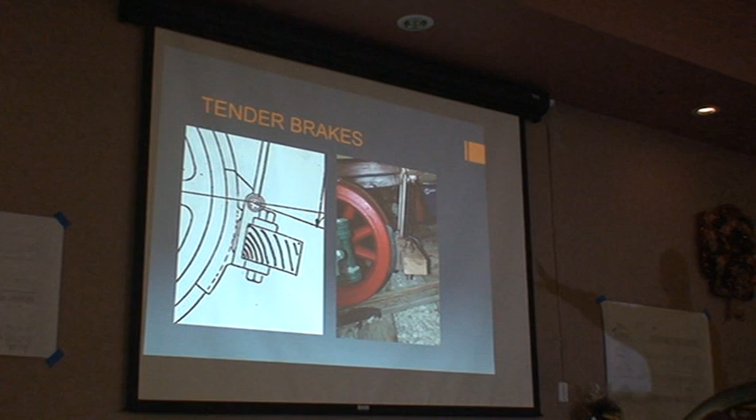Unlike a lot of restoration projects, a real challenge we've had is that we don't have anything to start from. There are no, as far as we know, existing parts of the Lyon, so everything has to be built from scratch. So here you can see, on the right-hand side, the actual Lyon's tender. This is one of the tender trucks. And over the last year, we've been fabricating parts of the brake system. So you go from a drawing of a brake on another Union Iron Works locomotive from that time frame, into bringing that into existence.

Now, we are, as you might imagine, a pretty low-budget organization. Unlike state-sponsored museums, we don't have access to even meager tax dollars. We don't have a museum where we can really have enough of an attraction to charge people admission. So we have to get by sometimes by hook or by crook.

And in this case, when we were fabricating brake beams for the locomotive's tender, we actually made friends with somebody who owned a steam-powered sawmill in Iowa. And there was a windstorm, so some oak trees had fallen over. So we asked somebody if they'd please give us their fallen oak trees, which they were happy to do. We took them over to our friends at the steam-powered sawmill and had them cut up our brake beams as well as a pilot beam for the locomotive. Total cost, $0.

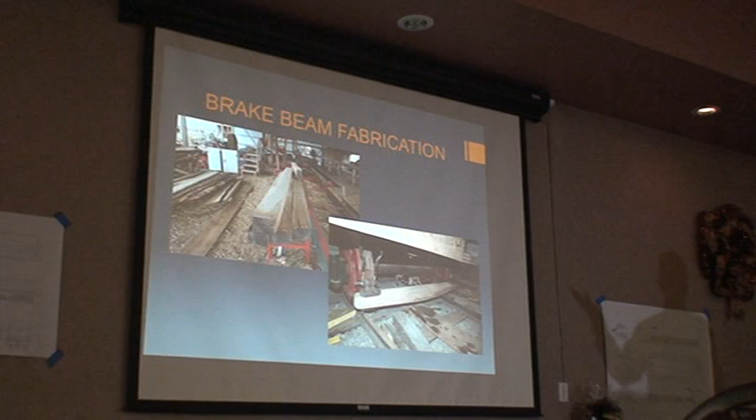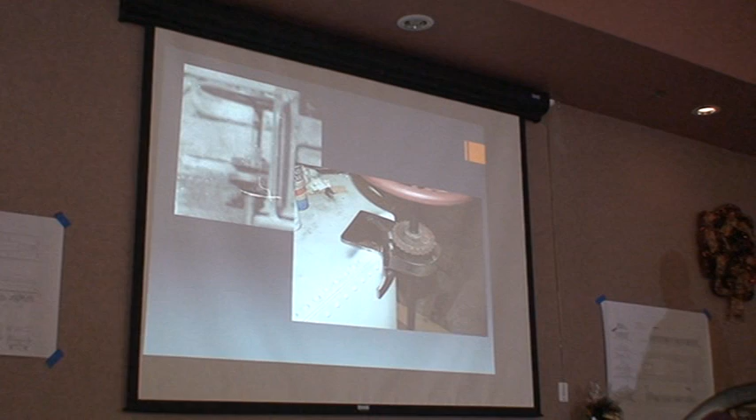Then we're also doing classic rivet counting. So we want to make the LYON replica as accurate as possible, but when you're dealing with things like a tender and you don't have a measured drawing to go off of, you've got to look at photographs. You've got to study, well, how many rivets are attaching the brackets to the tender? And then how high up does that go on the tank so that we can come up with the size that we're going to use for our original. And in this case, the tender attachment brackets, we were able to get a blacksmith in Iowa to fabricate those, again, for free for us so that we can keep the project moving forward.

And here you see Stan Gentry with his homemade rivet furnace, taking out that white thing at the end of tongs. That's a glowing hot rivet that he is taking over to the tender so that we can rivet the attachment bracket onto the tender tank.

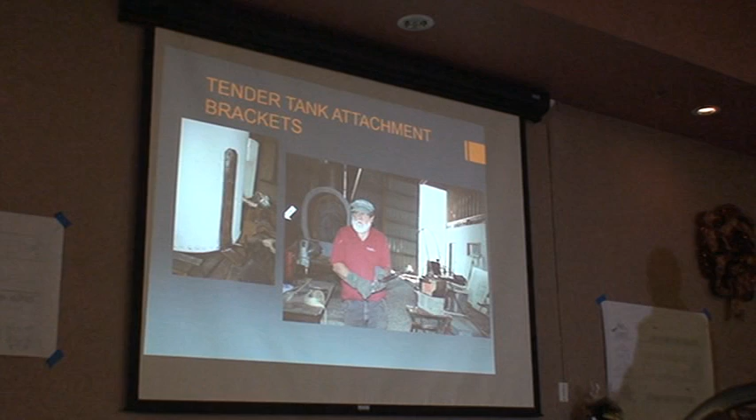And then about a year ago, we were very happy to finally, for the first time in, actually, about 100 years, unite the LYON with its tender. So we dragged it outside the main museum locomotive shed and had the LYON together with tender. What you see on it right in this photograph is not the boiler. This is a wooden mock-up of the boiler that was made so that the LYON could participate in a 4th of July parade. And that's an interesting story.

You could call that a parade, but actually during the course of research for paint, so we're trying to figure out what color was the LYON, what did it look like? We were searching through old newspaper articles, and fortunately a lot of newspapers, especially historic newspapers in California, have been digitized, and you can search them using a word search. We found a mention of the parade in San Francisco to celebrate the completion of the Transcontinental Railroad, so the Pacific Railroad parade. And there was an account of all of the units that marched in that parade.

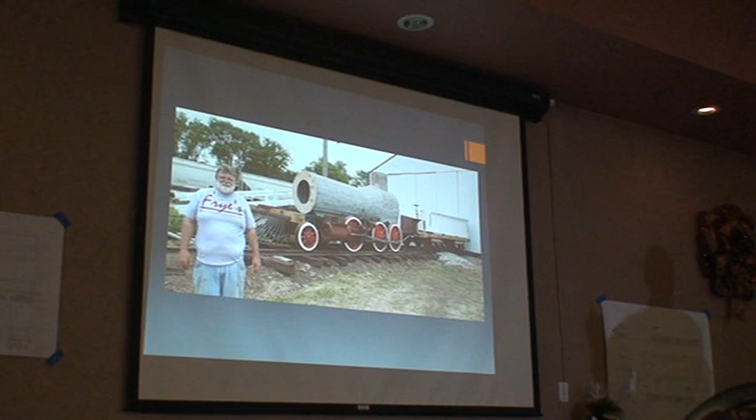So we wanted to keep up the tradition and have the Lyon be in the parade again. And this is one of my favorite photographs. I think the last time we were here, I had this smokestack in a trailer outside so that people could see we had just completed the smokestack.

So this is when it's united with the locomotive for the first time. Of course, it had to be hoisted atop that wooden boiler. But you can see the front view, that very distinctive view of the Lyon with that absurdly tall smokestack. So I think that's a signature view of the Lyon right there.

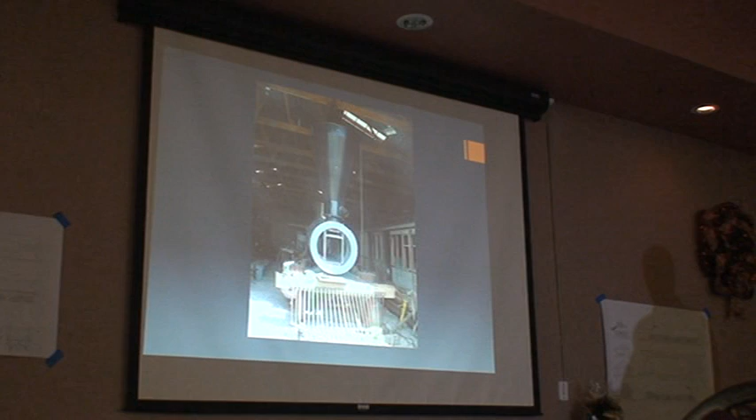Now the tender tank painting, this we could not have, I think, done anything remotely accurate without a lot of outside help. And many people who helped in that project are here in the room today, but I think no person helped more than Jim Wilkie. And it really started with a study of this photograph.

The Lyon did not have a very long service life on the Virginia and Truckee, only running from 1869 to the 1870s, and then very rarely used after that, and not used at all by 1890. So we're not sure if we're looking at any original paint in this photograph, but the overwhelming odds are that we are not. But it is the Lyon, and it does have some interesting clues.

We know from some of the newspaper searches that the Lyon was involved in an accident in which they dropped a flat car of cordwood and ran down to the Virginia City Depot to take on water. Then they ran back and forgot that they left the flat car sitting on the tracks. So the locomotive actually rear-ended a flat car, and it ended up damaging the rear of the tank.

Interestingly enough, when you look at this photograph, you notice that all this paint looks like it's in pretty bad shape, but if you look at the rear of the tender, it looks a little bit different. Maybe that's evidence of a paint job repair. That could be used to support that perhaps this was a touch-up of an earlier paint job.

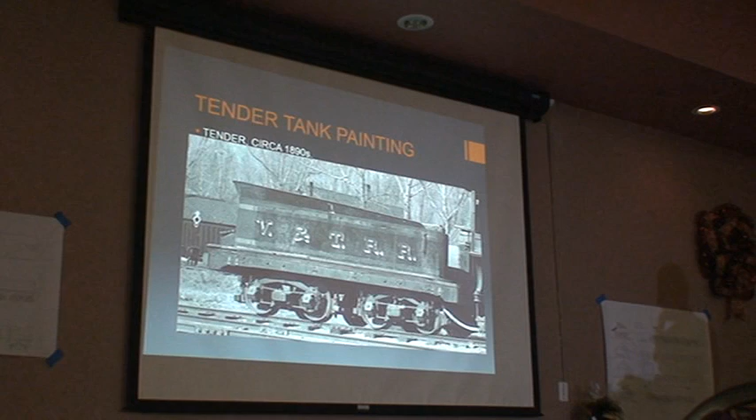We also know that the Union Iron Works was doing a fairly good job of copying Danforth locomotives. And so we try to glean clues from what Danforth locomotives were painted like during that time. So this is what we came up with and painted it on.

There's always a lot of room for debate, unfortunately, since we did not have the good fortune yet of discovering that color painting of the Lyon that's maybe in somebody's basement in Carson City. And of course, there's no color photographs. So this is really an interpretation based on a lot of different sources of information that are available to us, but this is the best guess that we could come up with of what it looked like.

And then there, I think, are some artistic licenses taken every now and then when you're doing a project like this. And I think one area is shading on the letters and outlining letters. You know, would a freight locomotive or a construction locomotive like the Lyon necessarily have gold leaf bordering the lettering on the tender tank? Maybe not, probably not, but it happened. I just want to make it absolutely clear that I did not specify gold leaf on that. That's right. That was the painter taking license with putting the gold leaf on there.

But Jim is a warrior for the truth on locomotives. And unfortunately, there are opposing forces. There are people who like things like red and gold. And so eventually, I think when the Lyon's tender tank is repainted, that gold will probably disappear.

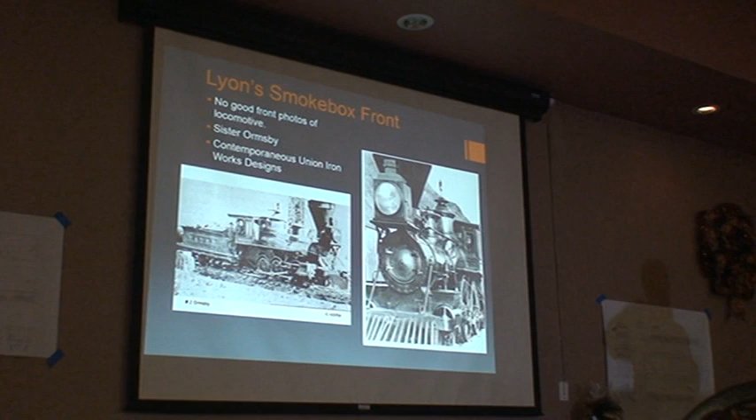When you think about locomotives, there are generally two styles of securing the front of the smokebox door. The most common one that most of us are probably familiar with is to use something called door dogs. So that's a little series of bolts that attach a foot to the door that holds it tight. Then there's also an interior lock, so that's more or less of an English style where you've got a handle in the center, and there's a couple of arms inside that retract, and then you can pull the door open.

And then you have this oddball style on the Ralston, which is actually no latch at all. They're just two hinges, two sets of hinges. So if you wanted to open this smokebox door, you'd have to drive out the hinge pins on one side so that you could open it up. So looking at all this is a really unique design, I think, for Union Iron Works, not commonly used by a lot of other locomotive builders.

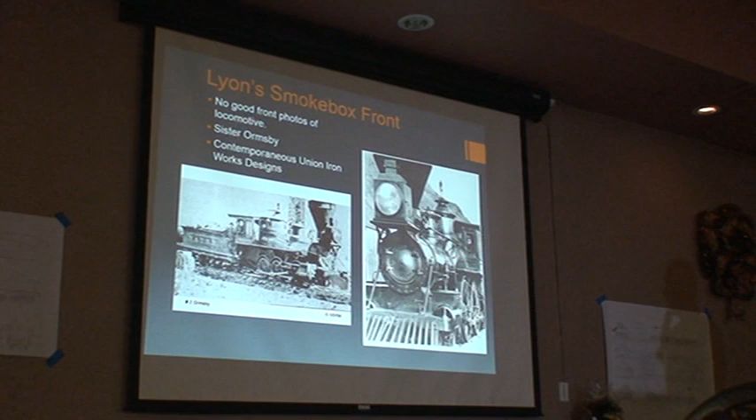So we try to arrive at, well, what do we think might have been used on the Lyon? This is kind of what we settled on. It's a hybrid of the two views. So in the view of Ormsby as Mountaineer at Lake Tahoe, we see what looks to be a fairly plain door. And of course, on the Ralston photograph, more decoration. You've got a raised half edge, and you've also got the name and place of construction and year of construction cast into the door on that locomotive.

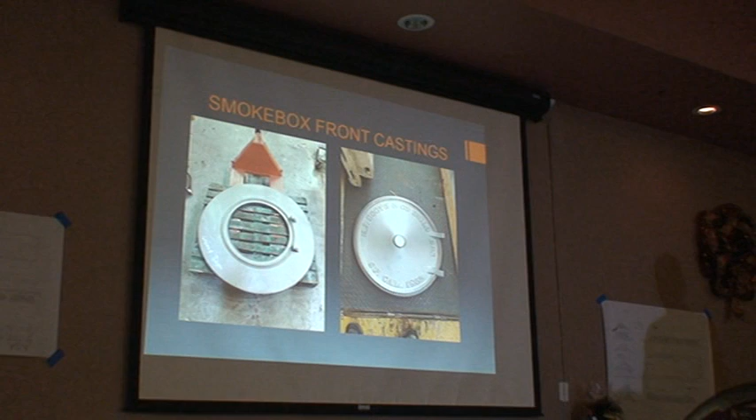So rather than duplicate the dual hinges, we decided to go with a more traditional set of hinges on one side, but we picked up the rest of the design from the Ralston locomotive. So you can see these are fairly large castings. That's a standard size pallet that the smokebox door ring is sitting on. That's about a 400 to 500 pound cast iron piece. And then that door, because of a pattern making error, weighs almost as much. It's a very, very thick casting. Yeah, one of you has one of those doors.

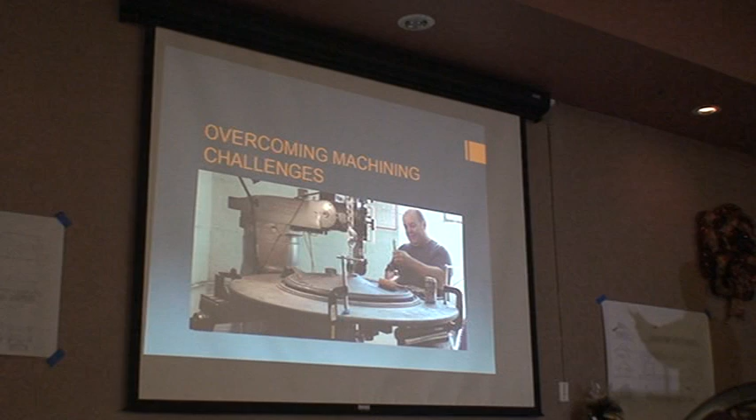And then, as I said again, we don't have a lot of the resources that state-funded museums have, or even that some of the upper-tier private museums have. So we've got a locomotive shop with some machine tools in Iowa, and then we've got a machine shop in Burbank, California. This is machining the hinges for the front of the Lyon on a standard Bridgeport knee mill. So these parts far exceed the normal rating for that machine. So you see some interesting work support going on here.

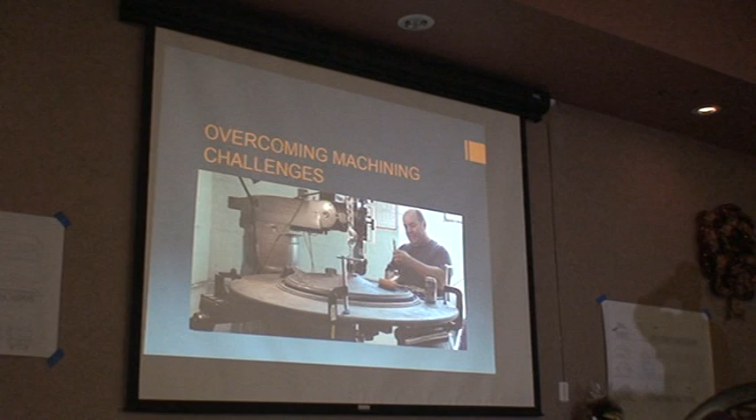So this, in the center, this is our shop crane hanging overhead, which is holding onto the door so that it doesn't sag too much. Underneath all of this piece, it's not all that visible in the photograph, is about $200 worth of aluminum that's been specially machined to extend out the table on our mill so that we can support the piece. So this is used to machine all of the door surfaces, to machine the door ring, including the about 45-inch diameter circle for all the attachment bolt holes that go around the outside.

You can see we're a little excited when we finally got it all together and were able to open the door for the first time. And then this is the finished product. So what we went with is, rather than door dogs, which really would have mucked up this decoration around the rim of both the smokebox door ring and the door itself, we went with the center style latching mechanism. So all the latch mechanism is actually on the opposite side of this door. So you turn it 90 degrees clockwise, and that's open, and then you can open the door.

And then, of course, we did a number plate because there is a photograph of the Lyon when it's on the scrap track with the remains of the Ormsby, and you can see in shadow evidence of a number plate. You can't tell what, if anything, it says on it, but you can tell that there was a number plate on the locomotive. We will never know probably what that plate looked like exactly, but we can see that there would be evidence of it.

And we know that on a busy railroad like the Virginia and Truckee, it would be important for you to be able to identify trains coming at you, and you would do that by being able to identify the locomotive at the front of them. So we can only surmise that at some point, either when it was constructed or afterward, a number plate was added to the locomotive. So that's why we've decided to replicate that here.

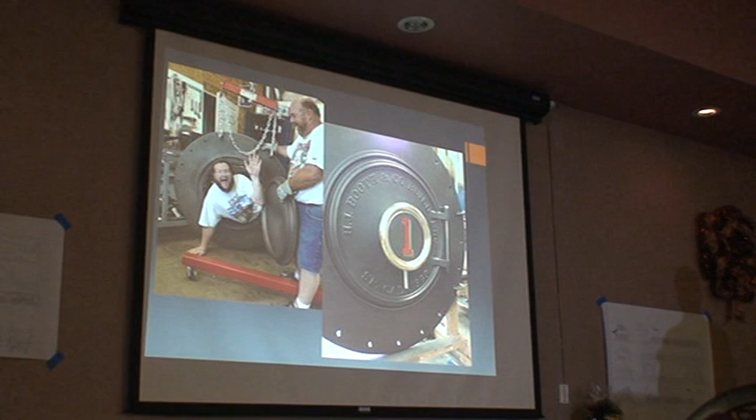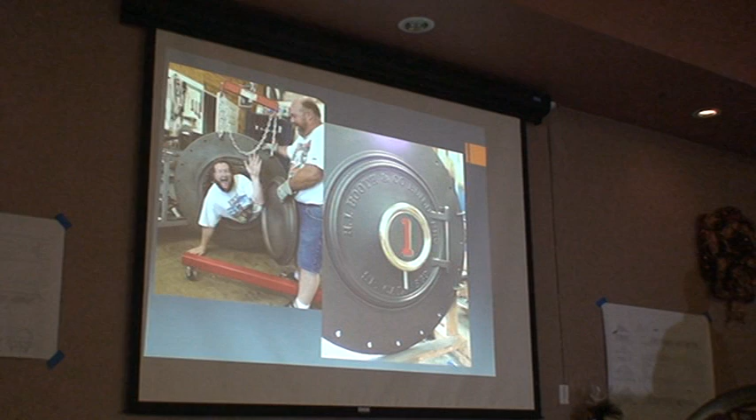So in the case of the Lyon with a green frame, it's entirely justifiable that you might have a door that would be green on the inside, and perhaps some of these raised decorations on the outside might have a stripe on them as well of a different color. But for the time being, we're going with black. That's a conservative choice, I think.

Then the next big thing is the last thing that we've been working on, and I think it's the most important for the project. When the Lyon was begun back in the 80s, in the drawing phase, money was really not an object. These days, when you want to build a pressure vessel, money becomes a real problem. And we're talking about a locomotive that we want to be able to run anywhere. So it has to be FRA certified.

So that means we have to build it to the highest standards. All the material has to have careful documentation. It all has to be up to the highest material standards. There have to be inspections. Well, when the money ran out for this as a private project, the boiler project really died in its tracks. And it sat around really just as about a 30% complete boiler for over 10 years.

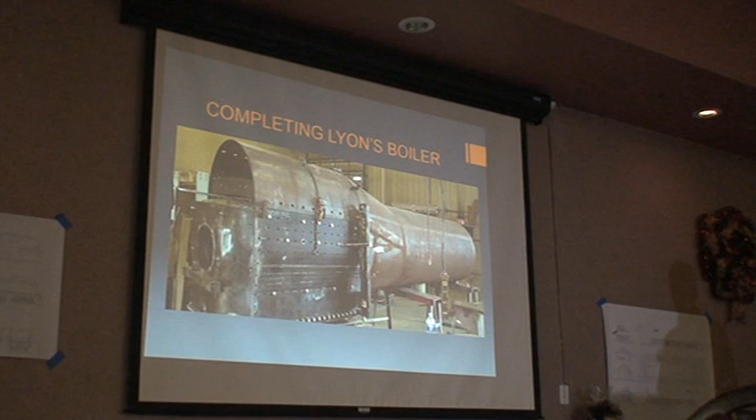So it's very important for us to try to raise money to finish the Lyon's boiler, and 2 things happened that made that possible. I think the first thing is Stan Gentry met Dave Kloke. I think you all either know Dave or know of Dave, a fantastic builder of locomotives. He built his own Leviathan replica and then built the York 17 locomotive that's out there starring in the East Coast.

Dave has the qualification to build boilers. Dave also has some really amazing friends, and Fred Haberkamp is one of them. He was out here, I think, about 5 years ago. Fred is an extraordinarily generous man, and he donated the money that it took to get the Lyon's boiler done. So Fred, working in conjunction with Dave and the rest of us who are working on the project, were really able to get the Lyon's boiler moving again.

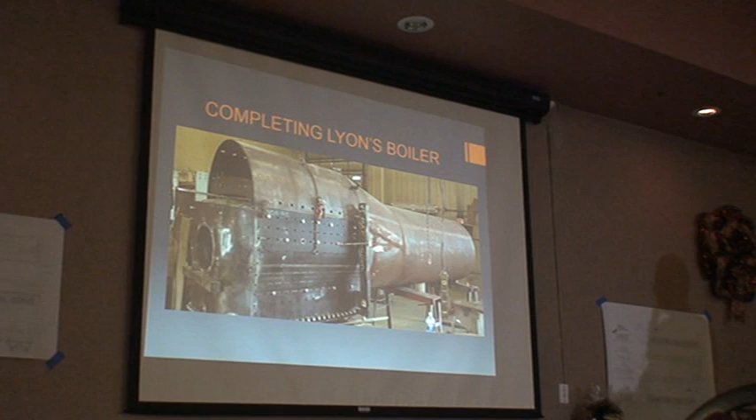So here we see the boiler getting the firebox attached to it, so you can tell what's new and what's been around for a long time, because what's been around is rusted and what's new is not. And so this is in Dave Kloke's shop, and we're fitting up the smokebox for attachment, or not the smokebox, but the firebox. Does anybody know what this is a photograph of? This is a photograph of controversy.

Back when the Lyon's boiler was originally designed, it was going to be constructed by the Strasburg Railroad. And a man named Linn Moedinger, who you might know, designed the boiler. And when we weren't really that concerned about how much it would cost to build the boiler, we thought, wouldn't it be great to try to duplicate the Lion's boiler as much as reasonably possible with the modern safety requirements? We know from drawings that the original Lion had a crown bar boiler.

And what a crown bar is: for the modern steam locomotives, their boilers have what are called radial stays. They're straight pieces of metal that go down from the outer shell into the crown sheet, which is the sheet of the boiler that sits right above the fire. And that's how it's held in place. That wasn't always the way they were constructed. They did use crown bars at one time.

So that's a thick bar that runs across the top of the crown sheet, and then it has some slings, and what we see here are the slings. These are tack welded to the top of the wagon top part of the boiler, and they're held in place. So the boiler was designed to be a crown bar boiler.

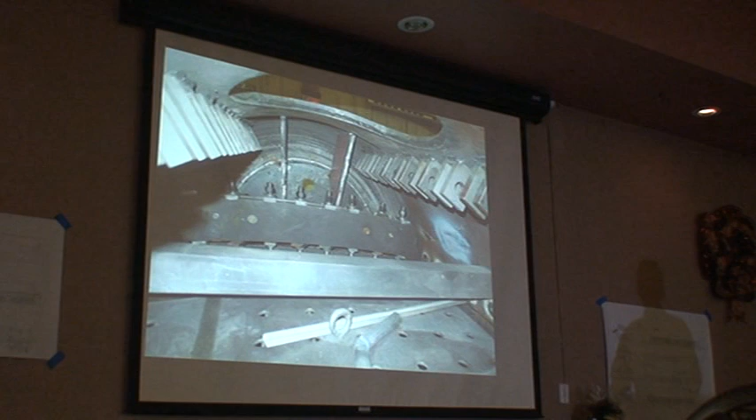All the material was bought and cut for it to be a crown bar boiler. And then we start the project up again, and it turns out that building a crown bar boiler is difficult and it's expensive. It's a lot more difficult and a lot more expensive than doing a radially stayed crown sheet. But because we had the parts, and because we're trying to replicate the Lion as best we can, we went forward with that. That's caused a little bit of debate about whether that was the right move or not, but the boiler we have is now a crown bar boiler.

Another thing about restoration versus reconstruction. When you do a restoration, one of the first things you do with the boiler is, you've seen them where they'll draw a grid on the boiler and they'll determine how thick the metal is, what needs to be replaced. You can test all the stay bolts to see which stay bolts are broken or which ones are too eroded and need to be replaced. And that can result in some pretty difficult work, replacing sometimes dozens or even 100 stay bolts. You've seen that on the Glenbrook project that Chris has been completing.

When you build a locomotive from scratch, every stay bolt has to be, first of all, made and then installed. You can't go down to Staybolts R Us or Boilers R Us or the Boiler Mart and buy any of these parts. So the Lyon has over 300 stay bolts in it, even though it's a small boiler. So every one of these requires a certain amount of handwork. At this stage, the boiler's been tipped on its side so that the workmen can more easily get to the stay bolts that stay the sides of the boiler.

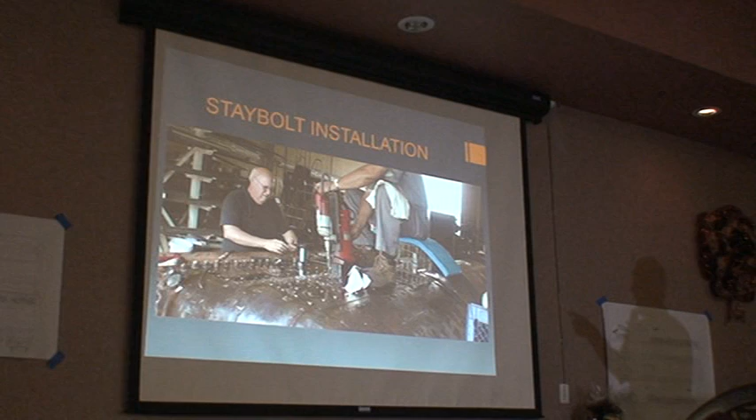So this is a photograph. That's a magnetic drill, a drill that's got giant magnets on the bottom that you can turn on and off so that it stays steady on the boiler. And then we're reaming out every single one of those holes so that it's the exact dimension it needs to be. Then what will come in afterward is every one of those will be threaded. And they have to be threaded through both of the holes so that the stay bolts can be installed.

So another difference between modern construction and period construction is, if you were building a boiler from scratch these days, you would probably weld in the stay bolts. It's a great labor-saving device. Because the Lion originally had threaded stay bolts, they would have been hammered over. We replicated that. Again, it adds substantially to the cost involved in doing it.

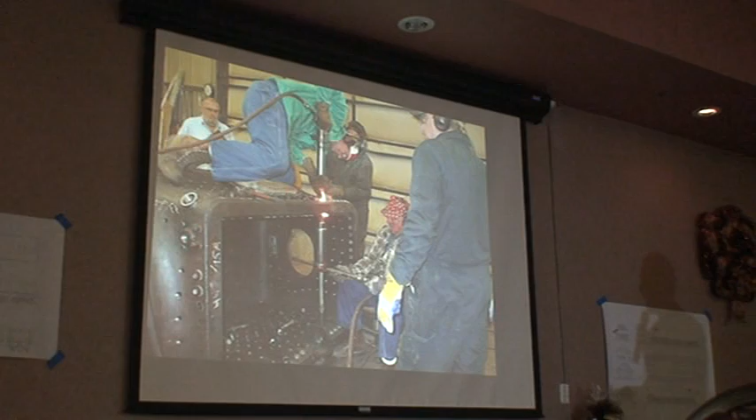So when you build a boiler and you weld it, welds result in dramatic differences in heat while the welding process is going on. And that creates stresses in the metal. And so you're required, when you're building a pressure vessel, to relieve those stresses. The way you do that is you take the entire boiler, and they still do this with other large parts, and put it into an oven where it's gradually heated up and then gradually cooled down.

Well, because this is a crown bar boiler, we could not install the front tube sheet for the boiler flues until after the crown bars were all tightened down. Because when you heat treat, everything changes shape a little bit. So the bolts that are holding the crown bars over the crown sheet and holding the slings in place all loosen up a little bit.

So they all have to be tightened down. So that means somebody has to go in there and do that. And so when that's all done, you can finally put that front tube sheet in. And so then somebody has to come out and do an area-specific heat treat. Cost about $25,000 to area-specific heat treat this.

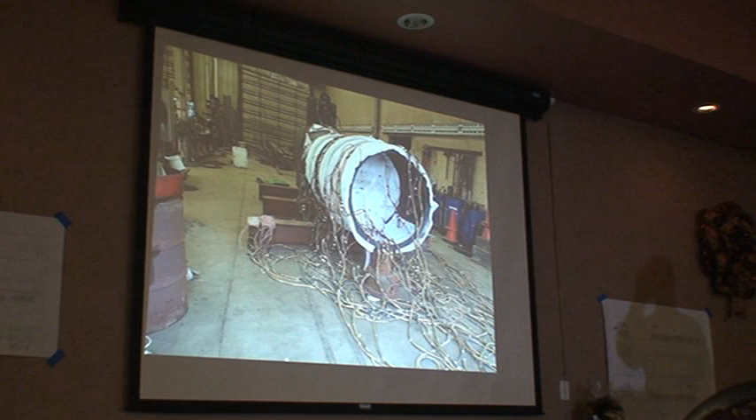So we had to go in and have that all redone again. Fortunately, the second try was on the heat treater and not on the builders. So now that we've got the boiler welding all done, it's all been heat treated, the dry pipe is in, and the dry pipe, for those of you that don't know, that's what connects the throttle to the outside of the boiler, so that there'll be pipes that will connect that to the cylinders.

Actually, this weekend, flues are going in the boiler. That should be completed in a couple more weeks, so we'll have a boiler that's done. Then we're talking about a locomotive that's about 80% complete. We're really at that point talking about, in order to get the locomotive in a condition where it can run, plumbing, really. I mean, the Lion right now, all of the running gear is done. So now we're talking about constructing a cab, domes. Yeah, there is a steam dome now, but there's a decorative dome cover that goes over that.

And we're really, what I like to say, pushing the rock downhill now. When we didn't have the boiler done, that was such a huge fundraising obstacle that it really felt like we were pushing a really heavy rock uphill. And now that that boiler is done, the Lion project is really going to start coming together. And I hope that when I come back in a year or two, you will maybe see some video of a locomotive getting some steam tests done.